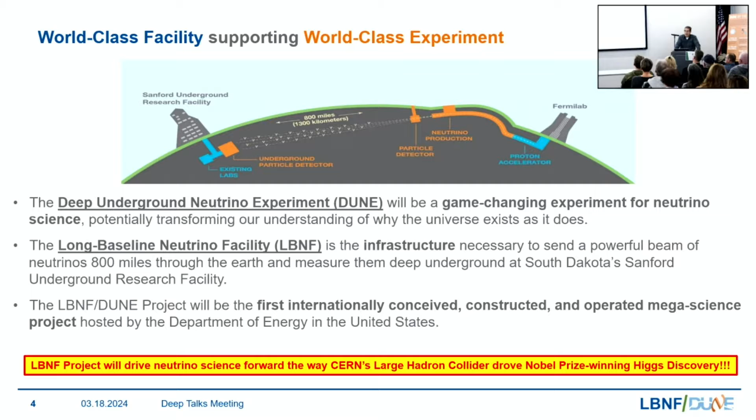I call this next slide the big picture. What you see on this slide, the project is broken up into 5 sub-projects. There's the far site location, which represents Lead, South Dakota here. And 3 of those sub-projects are here and going to be built underground, starting with the far site excavation, which you're going to hear more about in this presentation.

In addition to that, you've got the BSI, which stands for Building and Site Infrastructure. And then you have the FDC organization, which stands for Far Detectors and Cryo Infrastructure. All three of those projects are going to be hosted here in Lead, South Dakota.

Now on the right-hand side of the screen, these are the two sub-projects of the five that are going to be built at what we refer to as the near-site conventional facilities. That lab is the Fermi National Accelerator Lab in Batavia, Illinois, which is a suburb of Chicago. The two that you see out there are the near-site conventional facilities plus beamline, and in addition to that, you have the actual near detectors.

From this picture, and it's a very simplistic picture of what we plan on doing when we start running the experiments, the neutrinos get launched from an accelerator located at Fermilab, which is 800 miles away in a different laboratory. These neutrinos will be launched underground, and they will be shot towards Lead, South Dakota, where we're going to actually measure and see if we can detect them as they come through. It's a very simple process. They shoot the neutrinos at us, and we catch them. It's as simple as that.

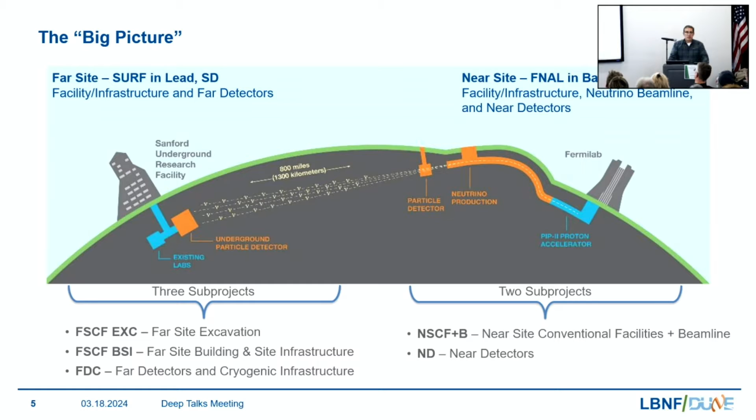So there are three science goals that the LBNF DUNE experiment is trying to achieve. The first goal is to determine if neutrinos are the reason the universe is made up of matter. The second goal is to prove Einstein's dream, along with mine, of the unification of forces through subatomic phenomena. And the third and last goal is to observe neutrinos emerging from an exploding star and probably witness the birth of a neutron star and/or black hole.

The picture on the left-hand side of the slide is what we're building one mile underground at the far site location. And the picture on the right is the near site location of what the facility is going to look like in Batavia, Illinois. So again, you've got the LBNF side, the far site that catches the neutrinos, and then on the right side at the National Accelerator Laboratory in Illinois, they're shooting the neutrinos at us.

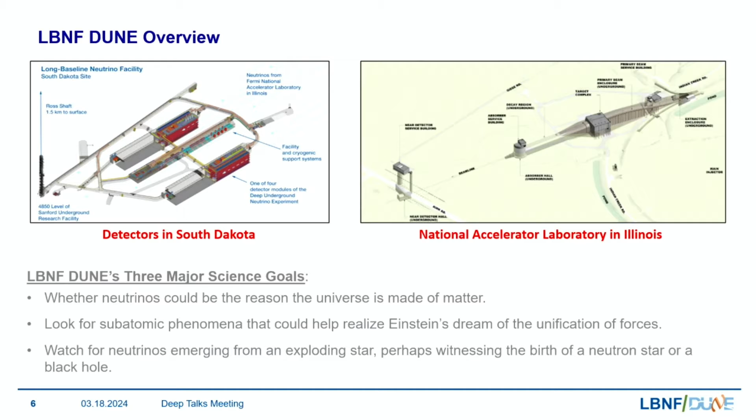All right, so this next slide is a satellite picture of what Lead, South Dakota looks like. A lot of people ask me, where is this experiment going to be? Well, first of all, it's underground, so you're not going to be able to see it. But if you happen to be sitting in the visitor center today, you could see that red box at the very top of the screen, at about 11 o'clock. That's the visitor center, and that's where you're sitting right now.

Now, just to throw out some points of interest along the way, if you're familiar with where Mill Street and Summit Street are, that's the intersection there. And just southeast of that, in that canyon along Kirk Road, if you're familiar with the abandoned coal plant out there on Kirk Road, you'll see where the LBNF project is currently being built underground.

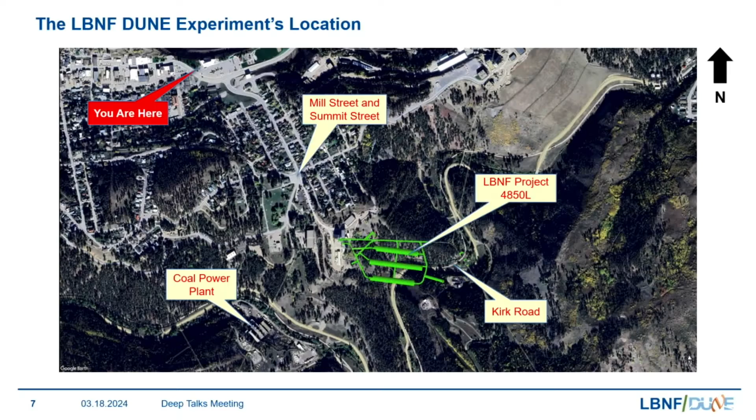So now you've all been educated in high energy physics in the field of neutrino research and science. Now we're going to move on to the exciting part, which is the first phase of the Far Site Conventional Facility, which is the excavation subproject.

I'm sorry? Can someone turn the lights off in the back? Thank you for that suggestion. Is that better? Okay, all right. Thank you for that suggestion.

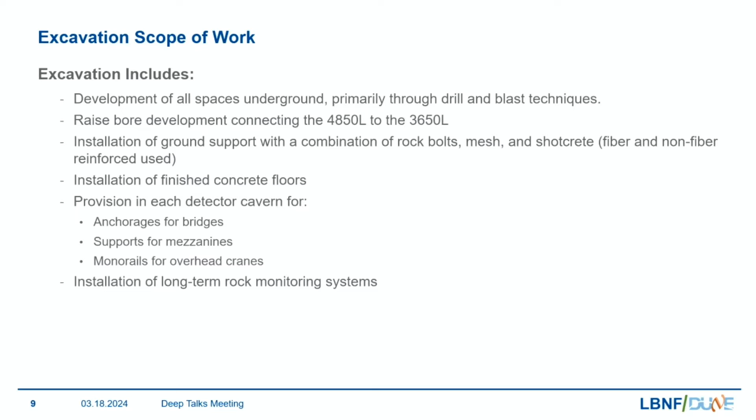All right, so let me advance to the next slide. This is a very high-level list of the scope of work that's going on underground for the excavation sub-project. You can see in those bullets and sub-bullets, it starts with the development of all the spaces underground, and that's primarily through drilling and blasting. In addition to that, the scope includes a raise bore development that connects two underground levels, the 4850 level and the 3650 level. We're going to discuss more of that later on in the presentation.

Besides that, we have the installation of the ground support, and that includes everything from rock bolts, mesh, shotcrete, and such. And every flat area that's been excavated to date will be poured with concrete, so there's the installation of the concrete floors for the drifts as well as the caverns. And each detector cavern, the north and south cavern, which you're about to see, has provisions for anchorages for bridges, supports for mezzanines, and monorails for overhead cranes. This is really teeing up the next sub-project, coming in just a few months, probably July of this year, which is the BSI sub-project.

And last is the installation of long-term rock monitoring systems, and that's required to detect underground movement, which I think is kind of important if you're going to be working underground a mile below the surface. This also is the basis of the scope of work for TMI, which we'll see here shortly.

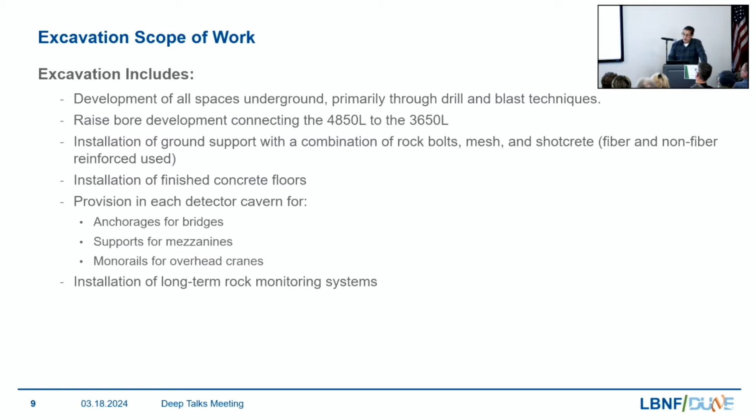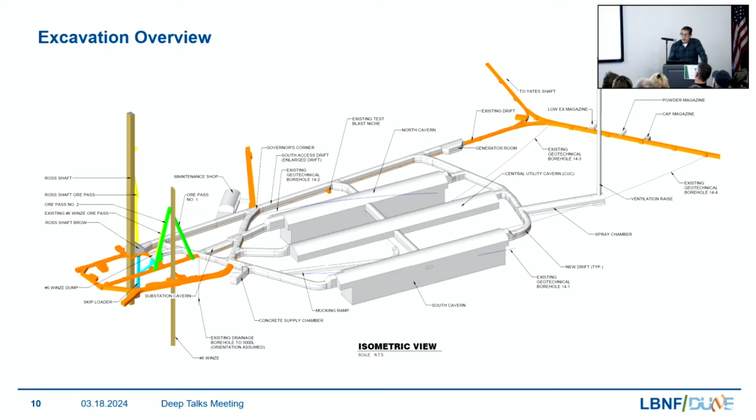So level to level, one of the things that Thyssen Mining had to do was to go ahead and put that raise in using a raise bore excavating type technique, which I'll show you later. But I just kind of want to point that out to you, and we've got some really neat videos to show you on that.

All right, so this is what the north and south caverns, as well as the central utility cavern, look like underground. They're very big. You've got the north and south cavern, and again, there's three caverns, but I only have the two shown here. But the north and south caverns are identical in size. So essentially, they're 66 feet wide for the north-south cavern right here. They're a total of 92 feet high, so that's like the equivalent of a 9-story building. And they're 475 feet in length.

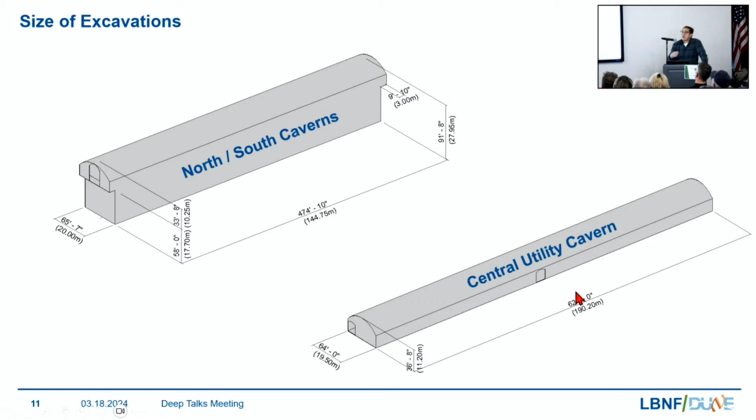Okay. Now, if you jump down to the central utility cavern, it's not as tall. It's only about 37 feet tall. It's 64 feet wide, but it's 624 feet in length. Okay, so the central utility cavern is what gives the power to the north and south caverns.

All right, so this next photo is a plan view of the underground. All right, so I'm happy to report that the excavation sub-project finished exactly a month ago today. So all the cavern spaces that you looked at in the previous slides, as well as all the drifts and the maintenance shops and all that, are 100% complete at this time.

The only thing that remains, and this slide is a little bit dated, is the concrete floors. If you remember, I said all the flat surfaces need to be fully concreted. So maybe about the middle of May, this whole drawing that you're looking at will be that same color, that green, and that green represents concrete complete.

So right now, the north cavern, and I'm just going to kind of hover around that with my cursor, that's probably about 98% complete. There's just a little section in the middle that needs to be concreted right where my cursor is, but otherwise it's pretty close to being done, and it most likely will be done by next week. And that means from one end to the other end it's fully concreted.

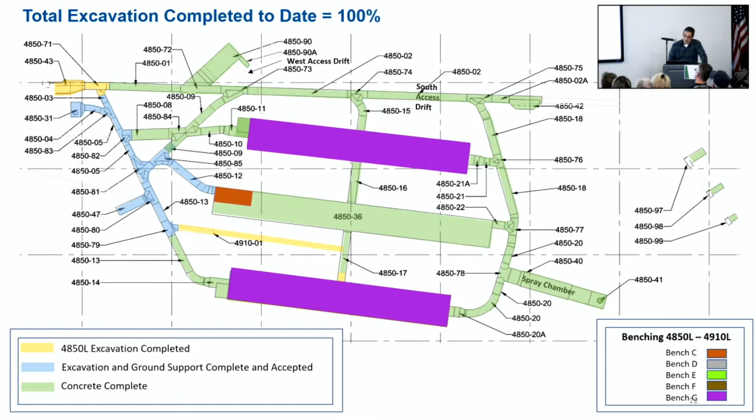If you jump down to the south cavern, it's about 50% done on the east end of this cavern. Right where my cursor is, that should be all green. And again, we should be done with the concreting activities probably about mid-May. In which case, if we were to look at this drawing, it'd be all colored green at that point. So we're only a few months away from being at the end of this project.

So this next slide, I call this my fun slide. I have to be careful on how I define fun. But this is what I call my excavation factoid. So what I've compiled is on the left and right side of the slide. A lot of people ask me, well, how much have you excavated? How much rock has been excavated, drilled, blasted, and brought to the surface? Well, the quantity is approximately 310,000 cubic yards, or the equivalent of 820,000 tons. Now, if you compare that to something on the right side, something that everybody in this room would be familiar with, 820,000 tons is the equivalent of the weight of 8 aircraft carriers.

Now, explosives consumed. A lot of people ask, well, how many tons of explosives are used? Well, that could be summarized as 560 tons. 560 tons of explosives were used to produce 820,000 tons of blasted rock or muck. So 560 tons produces 820,000 tons.

Now, if you want to put that to something that everybody would be familiar with, and this is where I have to be very careful so I don't end up on the Department of Homeland Security's watch list, the equivalent energy of 560 tons, that energy that's released, is the equivalent of 651,000 kilowatt hours. Now, what is that? That's enough energy to power 3,000 homes in Lead and Deadwood for a week. That just kind of puts it in perspective.

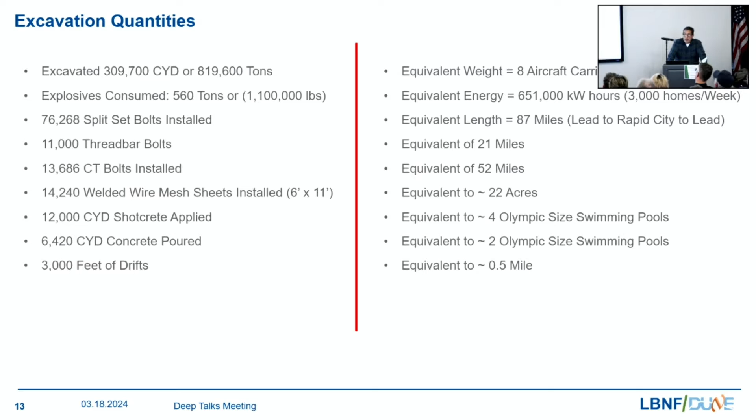Welded wire mesh sheets, I call them sheets, some people call them panels, but TMI installed close to 14,000 of these sheets, and they measure, think of it like a 4x8 sheet of plywood, but these are 6 foot by 11 foot. And they have installed 14,000 of them. So if you put them end to end, side to side, you'd have enough to cover a 22-acre small farm.

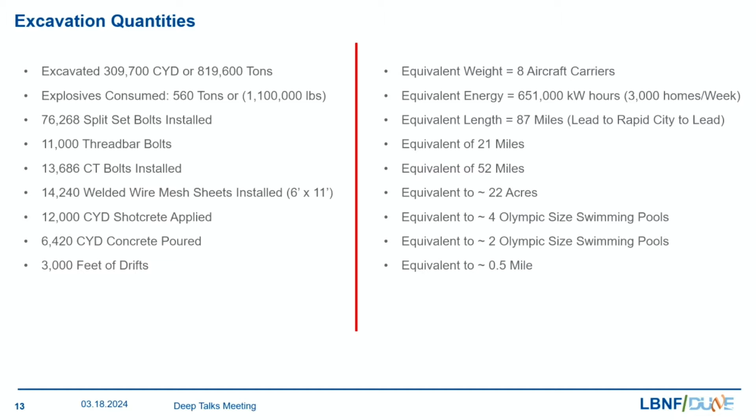In addition to that, cubic yards of shotcrete applied. You'll hear a little bit about this when Ryan talks about it in his presentation, but 12,000 cubic yards of shotcrete applied to date is enough to fill 4 Olympic-sized swimming pools.

Concrete poured: as you saw in the previous photos, we're still pouring concrete, and we'll still be pouring concrete for the next couple months. But what we've poured to date is about 6,400 cubic yards, and that's enough to fill 2 Olympic-sized swimming pools. And then last, as I mentioned before, we've got about 3,000 feet of drifts that have been drilled and blasted, and that's a little over a half a mile in distance.

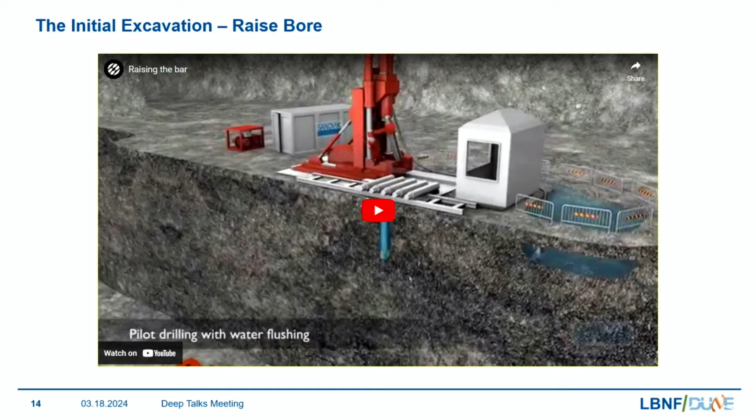So I've got a short little video, an animated video that I want to tee up for you guys. But every construction project has to have a starting point, and this project's not anything different. The raise bore was necessary to go in first for both ventilation and cooling. And I have a little animated video that'll take you through the process now.

If you remember the slides, we had 2 different levels. You had the 3650 level and you had the 4850 level. Doing the math, that's 1,200 feet between each level. And a level is like thinking of it as an elevation, okay? But this is underground, okay?

The process starts out with, and I'll just kind of circle with my cursor, this is the raise bore machine, okay? And it gets set up right over the target, and it just drills straight through, okay? And TMI had a directional bit to keep it on its target, but it had to hit a target that's over 1,200 feet away. So with that type of accuracy, they used a directional bit that was Wi-Fi controlled to keep that bit on target.

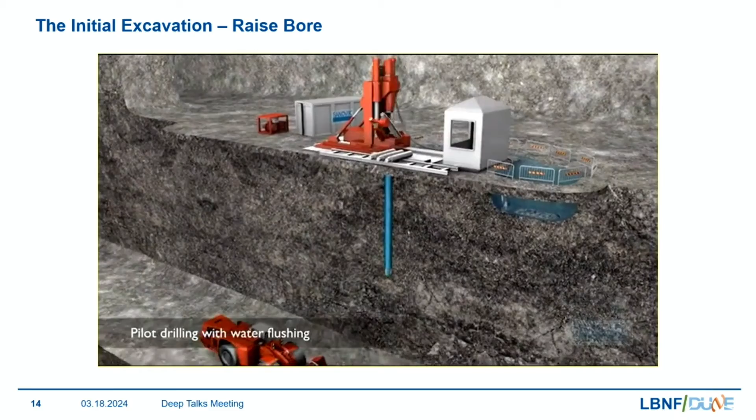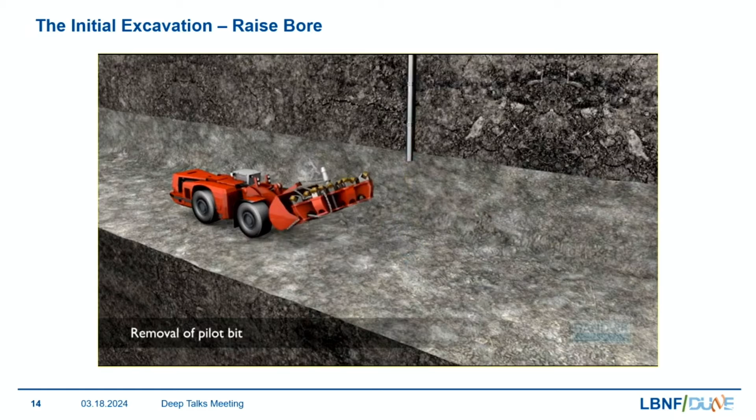So I'm going to start that video so you can see the whole process. So a little introduction here. But it all starts out with a piece of equipment set up over the target, and you can see those are drill strings or drill stems, and they get assembled, and then they drill deep into the ground until they hit the opposite end. In this case, the opposite end is 1,200 feet away. We take the directional bit off, we put this cutter bit, and we back ream it in reverse.

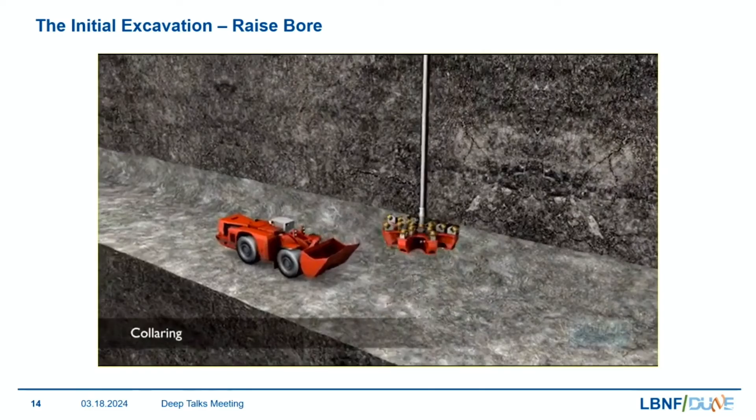So again, this is a very simple process, but a very complicated process, and to be able to hit that target with the accuracy that it needed to be was really important for this project. So this was something that TMI really shined on.

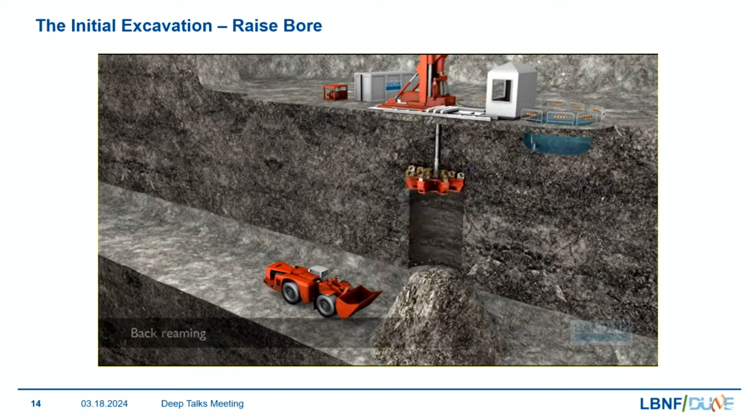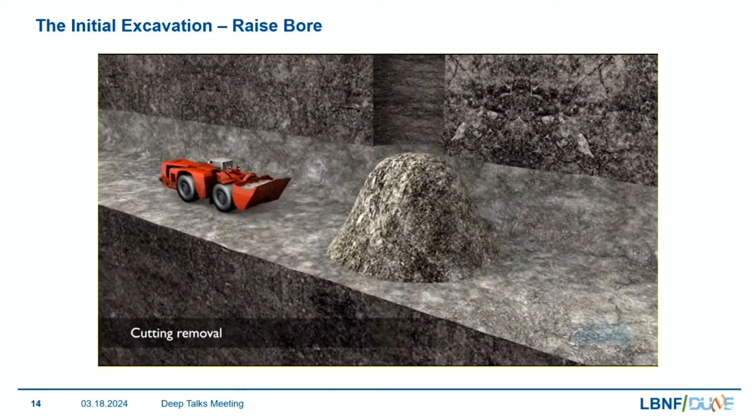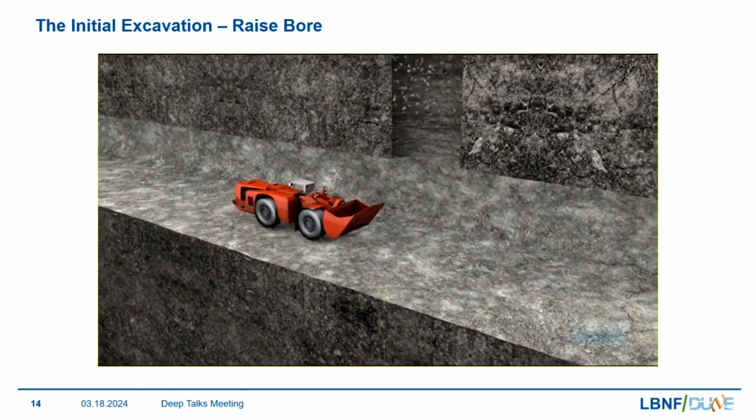Oh, okay. Sure, okay. That's good to know. Thank you for sharing that with us. She was saying that there's the same process in the Homestake days. They used the same process back in the day when they were mining for gold, and there's one just like this back at the mining museum. Smaller version of it? Okay. It's a 5 footer, 5 foot in diameter hole? Yeah. Okay, so this hole that TMI had to put in, it was about 12 foot in diameter.

So we'll go on to the next slide. The process that we did underground actually took us 5 months, okay? So I've got a couple pictures here. Again, I want to just hover around the 3650 level right here. There's the 3650 level, and that's where the actual raise bore is set up right over its target, and it drilled 1,200 feet straight down into the spray chamber, which is right here at the bottom.

Now, the picture on the right, you'll see James Ricard standing right next to the cutter head. This is after they dropped the directional bit off and they attached the cutter head to it, and they're getting ready to back ream it to create the 12-foot diameter raise for ventilation and cooling. Right next to James is Sid DeVries. He's one of our project engineers on the project team.

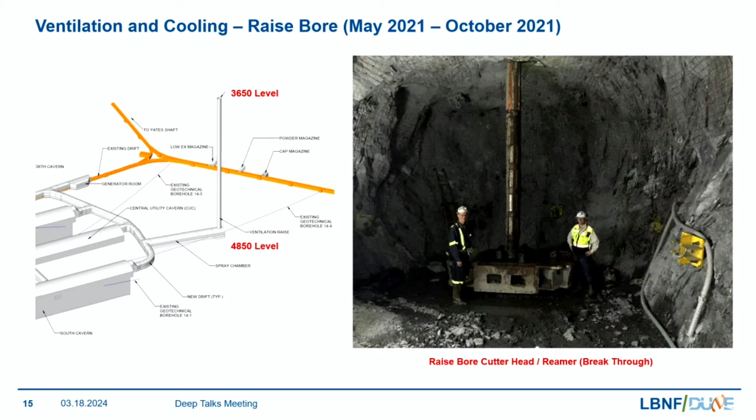But this, you can see, this is the overhead section of the spray chamber, and this is where the 12-inch bit came through, broke through into the spray chamber to allow them to attach the cutter head, which now will go back up and create that ventilation raise. So again, a 2-minute video, but it took us 5 months to get there.

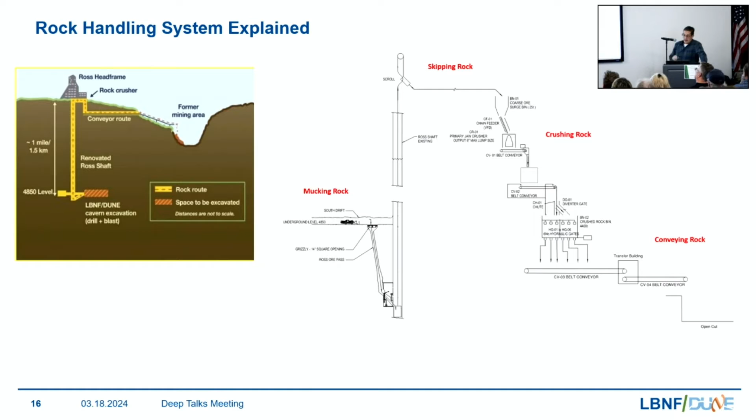The picture on the left is a more simplified cartoon illustration of how we bring the muck underground to the surface, where it's then crushed. Comes up through the Ross head frame. It gets crushed. It's put out on a conveyor belt, and then it's discharged into the open cut, which is right behind you right outside that window.

The schematic, on the other hand, is a little bit more intense. Essentially, what happens is when you're done blasting your rock, whether it's in the drift or in the cavern, we have this large mucker that comes up and it picks up all the loose rock and it takes it over to a grizzly. Now, a grizzly is nothing more than just a large sifter.

It sifts smaller rocks from the bigger rocks. The smaller rocks tumble down the ore pass. The bigger rocks get caught at the top of the grizzly, where we have a rock breaker, and it breaks big rocks or boulders into smaller rocks that allows it to go through the grizzly. Kind of very simplistic type process, but it works.

Now, once the ore, I should say the muck, goes down this ore pass, at the very bottom of this ore pass is what we call a skip. And it's waiting at the bottom, and all these rocks get loaded up into the skip. And a skip is nothing more than like a rectangular box. And so we load up this box. We typically get about 7.5 tons inside the skip, and then it brings it up to the surface.

Now, all that muck that's stored inside that box can't be put out on the conveyor belt. So at the very top of the process, we have a crusher, okay, up in this Ross head frame. I'm going to switch and I'll kind of point, here's the Ross head frame. This is where I'm currently at right now, okay? So it takes the 12-inch boulders and it breaks them into bite-sized rocks that are about 3 to 4 inches in diameter. And then that allows it to be put onto a conveyor belt, and that conveyor belt takes the rock out to the open cut where it's discharged.

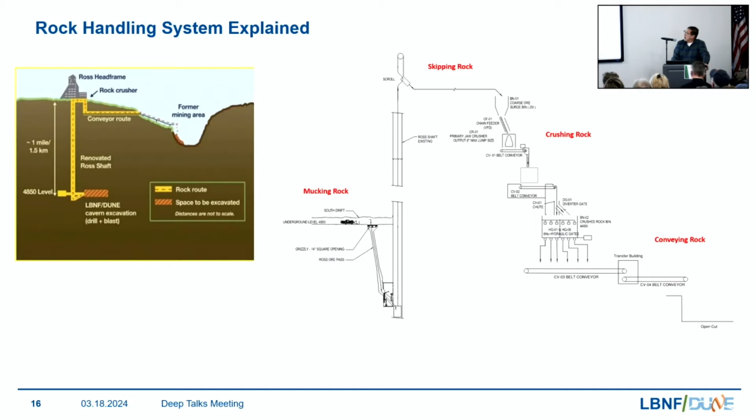So I'm going to begin with a video here. And this is a cycle of mining. How many people in here have been in mining before, have worked underground? A few? Okay, fantastic. Well, you guys will have to correct me if I say anything that's wrong, so feel free, I take that well. So this is a typical cycle of mining, and this was at another project that we did. So the video will start at the end, which is the blast, and that's where the new cycle begins.

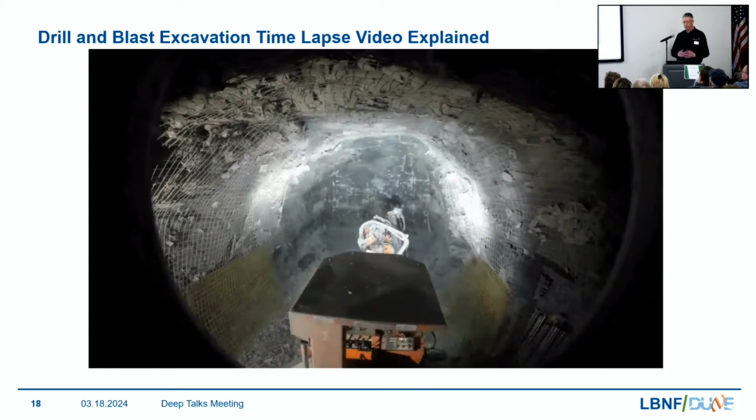So we come in, we muck it out, that's where we take all the spoils from that blast, and we clear that out, and then get ready. And because now you have loose rock overhead, we have to support that rock. So we come in with a bolter and we install bolts, as Mike indicated, with different bolts that we've used here, as well as those mesh panels that we install to hold it.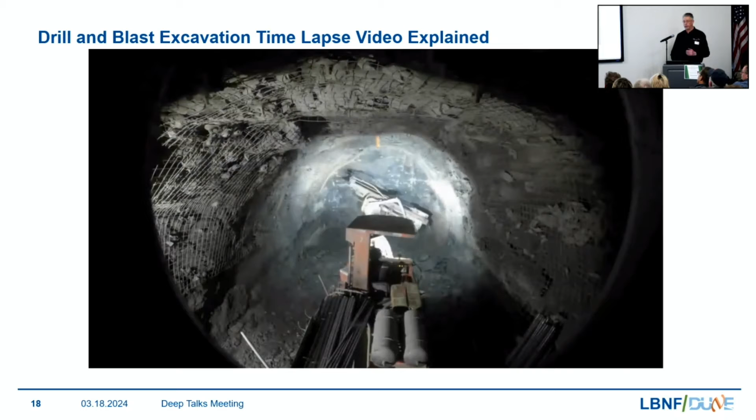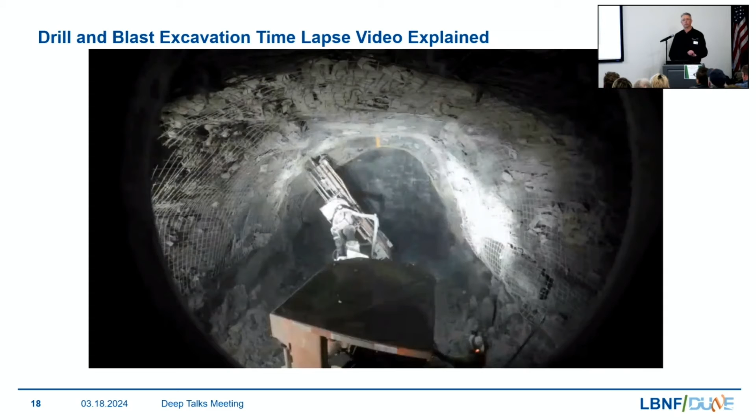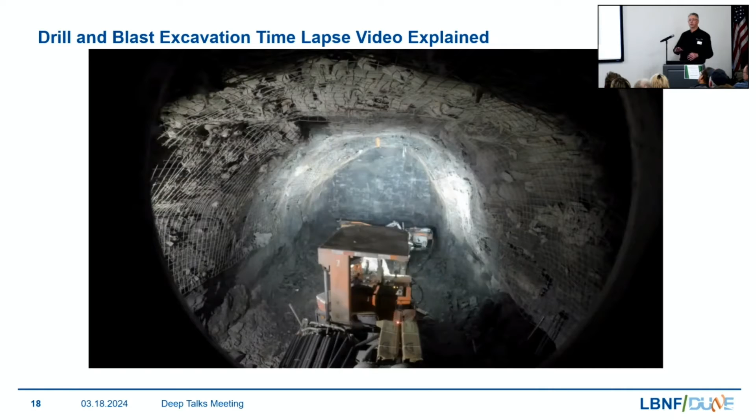Now, real quick, we use words in mining that are a little different. So Mike has said drift. So a drift is open on one end, and then it's got a heading where our working face is. So the face is what we're working on. Overhead is the back, and then you have the right rib and the left rib. Instead of using walls, right, we have to come up with our own language. It makes us feel better.

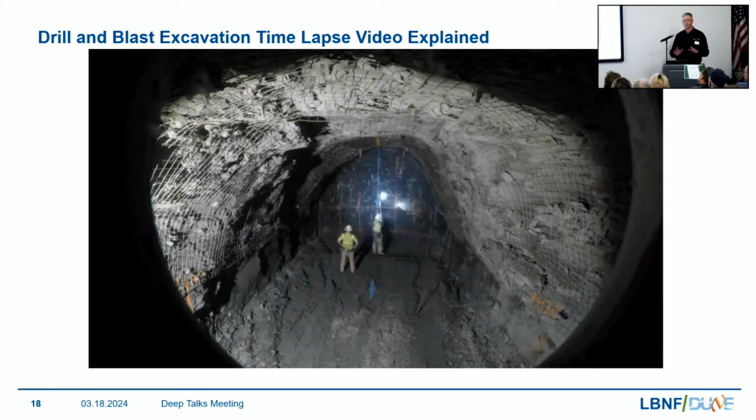So they're still bolting up here in the video, and then they'll get done shortly. And then they clean it up. Now here our surveyors are coming in, they're cleaning it up, and they're going to start marking the face or painting the face. That's where they survey it out and they find out where the next pattern is that they need to drill the holes in order to put the explosives in to blast the next round. This is repeated over and over thousands of times in a project of this size.

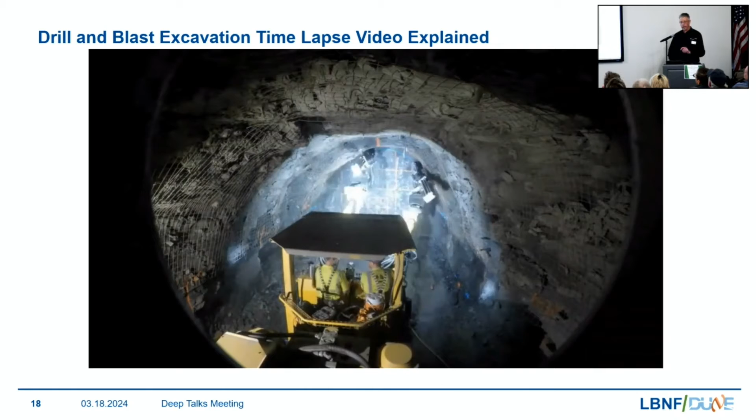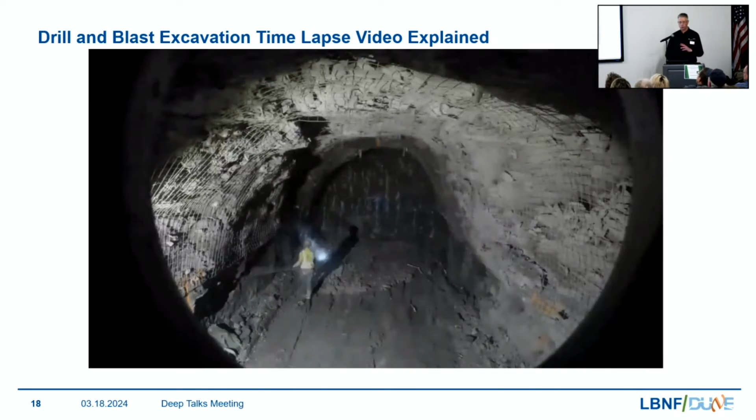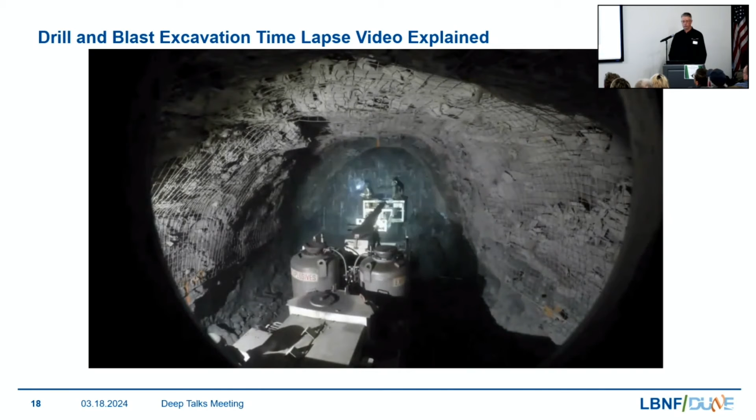So now we've got a drill in here, we call it a jumbo, and the drill has got two hands that come out and they drill the pattern for you. And so we've done that. We're now having it checked out. Now we're loading our explosive material into those holes for a final cycle of the round. Now sometimes there's an intermediate part where we spray shotcrete, which is another area for ground support. And so that's the end of it. So we've loaded the round and then blast.

All right. So here is a cycle that we did here at Fermi. Instead of blasting the face, we did downhole blasting. And so we've got a video here showing that. So you can see that it's set up. What we're going to do is we're going to blast this, and you can see all the holes that we drilled. So that's what you're going to be looking for right now.

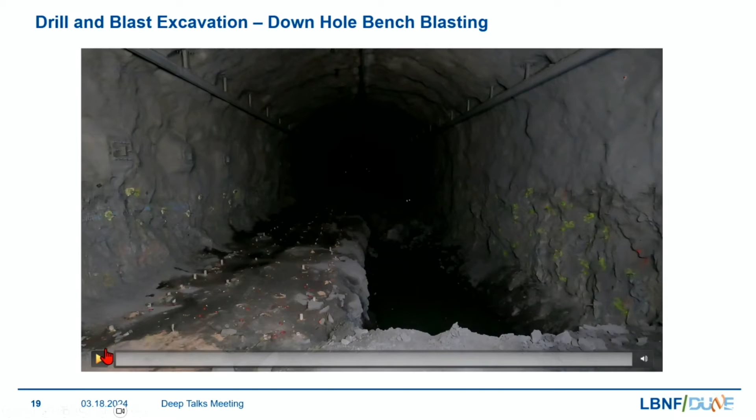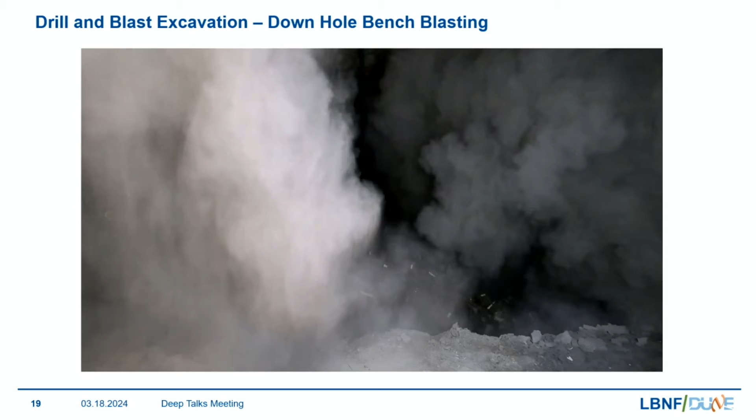And so after the blast, we also have to let the smoke clear and all that get out of there because there's a lot of harmful materials. So we smoke out and then we go in there and start the process all over again. So here's a couple still photos of the process. So you can see they're, as I said, setting out the blast pattern. They're painting the face. They also will need to do some scaling to get rid of some of that loose rock. And they're doing that with our jumbo, our drill.

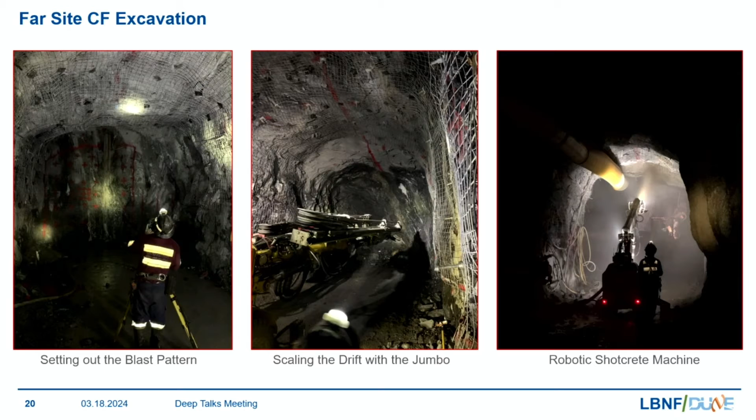And then the far right picture is that other phase that we used here at the Fermilab project, which is the application of shotcrete, which we sprayed on all the ribs and on the back, using that mining language again. So here's some pictures of the excavation of the caverns underway. So right here you can see those monorail beams on the top. Those were not used for the mining excavation at all. Those were used for the next phase of the project, the BSII and other phases, but we had to install those early on in the project.

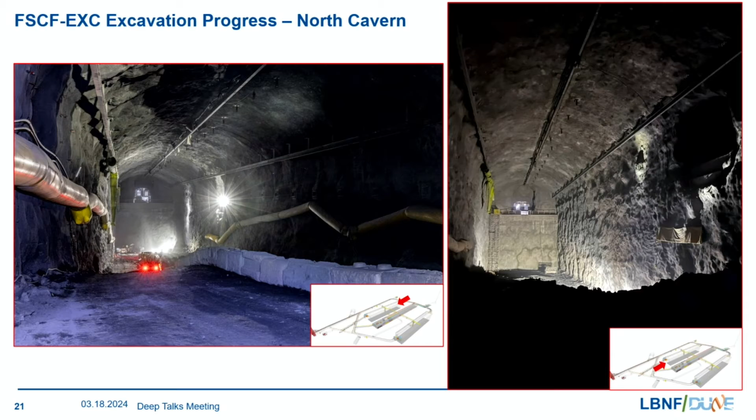So the way that we approach these caverns is we start at the top. So we do a pilot drift, and then we work our way down, or we bench down. And this is that process. Well, as we bench down, our gear becomes captive. So we have to build a ramp down, and that's what you're seeing on the left, a ramp down to the base of that cavern in order to get our muck out as well as our gear. And then the picture on the right is just another beautiful view of those caverns underway.

And here's a good view of the cavern as it's being constructed. We have a drill in there. Now just keep in mind, if you go out into the visitor center, you see that cage out there, or the elevator, as normal people call it, but we call it a cage, because once again, we like our own languages. And so everything that we put underground had to go on that cage. And so this large piece of gear had to go down through that shaft. So we had to cut it all apart and then weld it back together. We have some of the best mechanics in the industry, and they're here working on this project. And so they put that together. So every day our crews have to go underground. All of our material has to go down on that cage, same size cage.

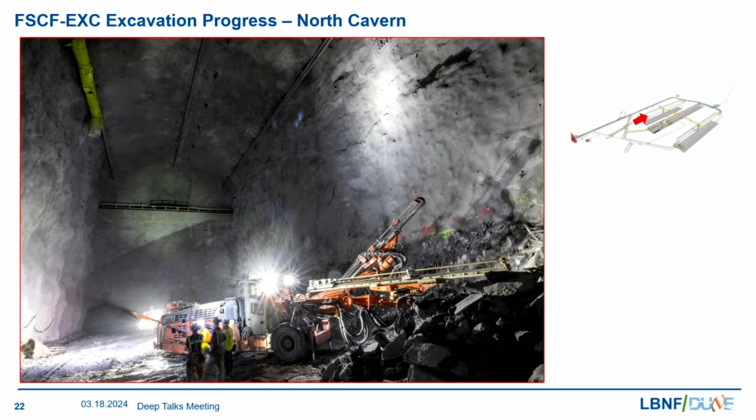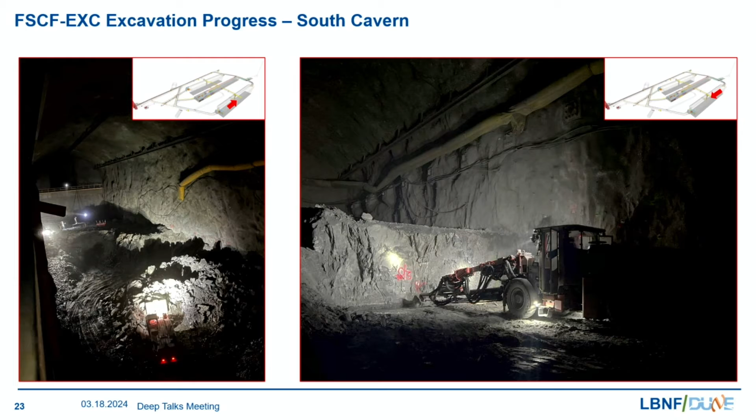That's the world's largest bolter that we had to bring into this project in order to put 20-foot long bolts into the back and into the ribs. Those are those CT bolts. So imagine that, the largest bolter that exists in the world, we had to take the cab where the operator works, we had to cut that baby in half.

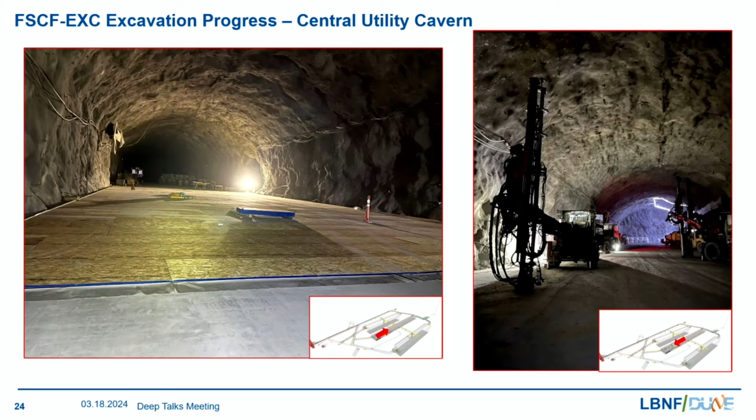And there's a lot of wires going through there. We also have great electricians. And so we brought them in to help put this gear back together. And then it had to be recertified by the company that supplied it. So very long process in order to mobilize equipment in an underground environment like that.

So here's a couple real wow me shots, right? This is the excavation as it's complete. You can see in the north cavern. So one of the aspects that we had to do that was touched upon was these large pedestals that we had to put in for the concrete. Those pedestals will hold the structural steel for these large tanks that's going to hold 70,000 tons of liquid argon.

That's a lot. So these massive tanks will come in. Well, those steels had to go onto these pedestals. So you'd see a close-up of the pedestals, and these little dashes you see on the side, those are square pedestals that we built in order to hold those structural steel tanks. And then you can see the floors poured. So really amazing to see.

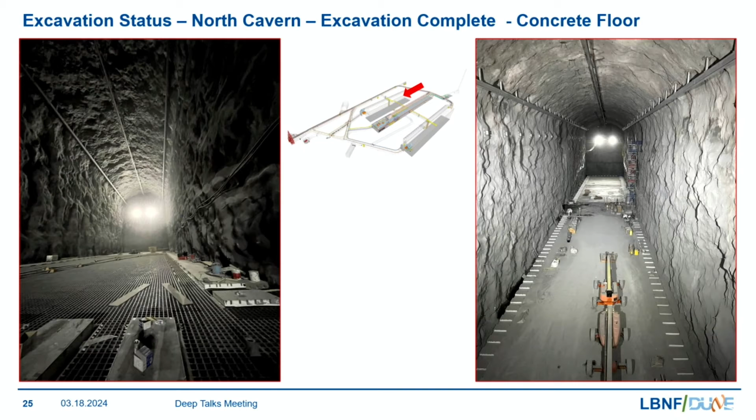You can't see any people walking around there, but these caverns are 90 feet tall. So if you did, that person would look wee little size, right? Little leprechaun in there. So here's a good picture. You can see a person walking in the cavern. This is once again standing on the concrete, looking down in the north cavern.

These are massive spaces that we built, and we're really proud of the work that we put into putting these together. Really excellent job, and I think that the quality of the work speaks for itself.

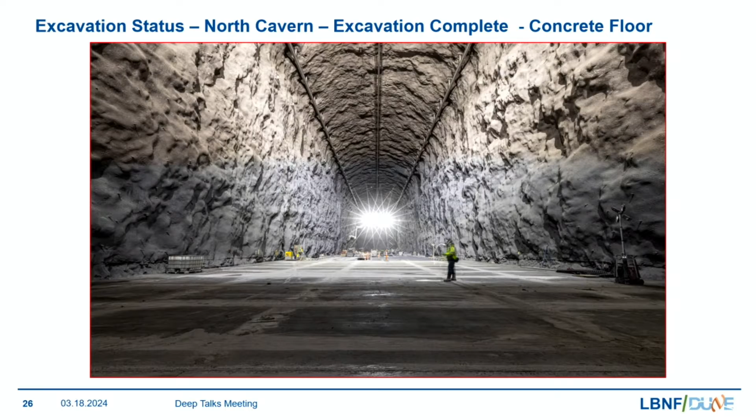And so the last excavation part that we had to do was where the Ross cage comes down and where you get off. In order to get all that steel in there for the next phase, these steel beams, they didn't want to weld them back together. And so they have to bring them down as large steel pieces. So we had to enlarge that space.

So before, when you got off the cage, it was about 10 feet roughly in height to the back. Now it's, James, what is it, 90, 80 feet? 60 feet when you get off the cage right now. So it's really impressive to see that space has just been enlarged and it looks completely different. So that's the last pictures we have of the excavation.

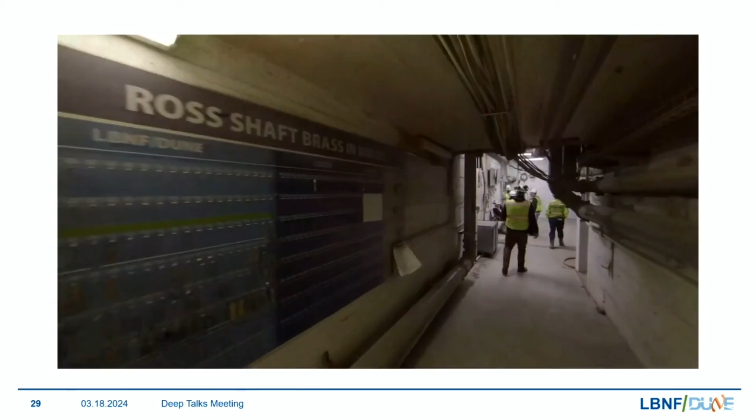Okay, so we're at the top of the shaft there. We're walking down the ramp now. You see on the left-hand side the brass board. That's where we tag everybody in, so we understand who is underground or not. Each person carries 3 tags, one to be at the top, one to be on the bottom, and then one to be on their own person.

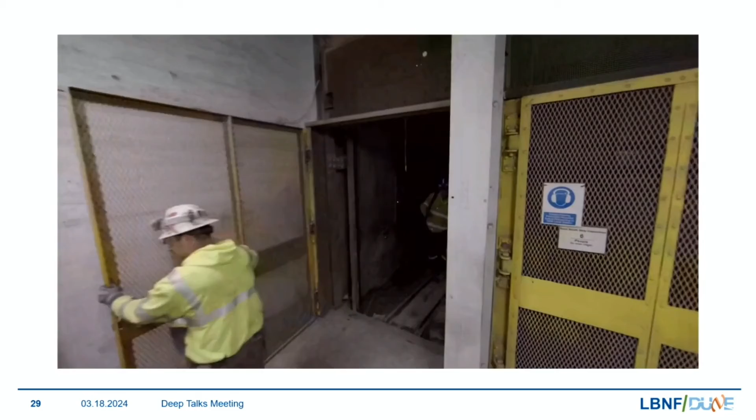That's the cage that we've been talking about. It's exactly the same size as the cage in the visitor centre. Normally we can carry 29 personnel plus 1 cage tender. I think on this cage here there's probably only about 15 or 18 people, so it can get pretty cramped, you know, when we get on there.

Takes around about 10 minutes to travel from the surface 1 mile underground to the 4850 level. And when we get to the bottom, you'll see us entering the Ross area just here. So the cage tender, he will put the cage on chairs. So basically that allows the tension to be relieved off the rope so we can offload and unload heavy pieces

of equipment. Because a lot of the equipment is actually placed in the cage and then rebuilt, or sometimes the longer pieces are actually slung underneath and then pulled out into the station. So the cage tender, he allows everybody else off the cage, and then they'll put their second brass on the brass board underground before going to their works area.

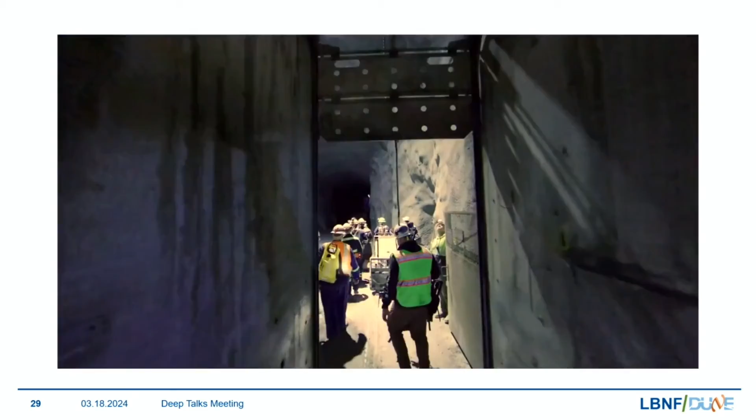So as we come out now, you'll see in the photo from Ryan, we'll be walking out into the Ross Station area. Total height now is 60 feet, and then it chamfers down. And this is mainly so we can get the large cryostat steel underground and easily off the slung load. Originally, this was only 10 feet high. So this was a major excavation and also close to the shaft structure.

We're now walking towards the workshop. That's TMI's workshop. This is where they do all the maintenance on the equipment, and also where they built, reassembled all the equipment after getting it underground. And this is where they're disassembling the equipment now to sling it back up out from underground.

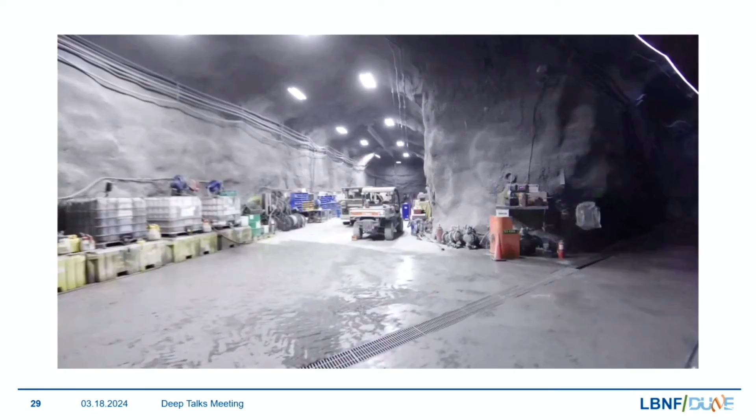After that, now we continue walking towards Governor's Corner. This is basically the main intersection underground on the 4850. Going in that direction towards the north is the West Access Drift, which allows us to walk all the way over to the Yates and the Davis campus. We're now walking towards the North Cavern, and we'll enter the cavern at the west end. We have an overlook there, and then we'll be able to see inside the caverns.

So as you walk toward the caverns, you can see the monorail beams in the crown and on the spring line. You see the ladder access way, scaffold access way to the left of me, and there's the guys working underground. We have some concrete slab there cast at the bottom, and then further back is the cavi drain, which is the drainage layer. This is a nice fly through with the drone showing the caverns. You can actually see all the shotcrete, which is a spray concrete that seals the caverns.

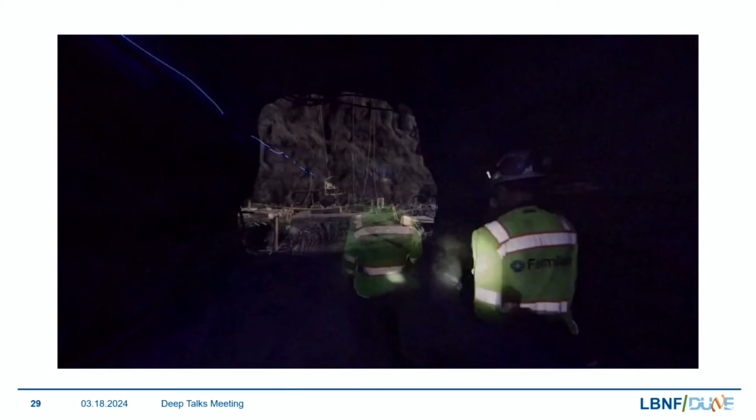Now we've walked down the decline. We're at the bottom. We're at the 4910 level. So this is where the workers are currently working to pour all the concrete. You can see the pedestals in the foreground and the shotcrete on the walls. And the workers there are installing the drainage layer, so any water that gets captured can go underneath the base slab and then out of the drainage system. This is a nice walkthrough with the camera showing the final base slab.

Now we're walking towards the center of the caverns. This is the middle of the cavern, and eventually there will be a steel bridge placed across this cavern to allow us to connect to the north, CUC and south cavern. We're now walking towards the spray chamber. This is where we install all that equipment to remove the heat from the experiment. And at the very, very end of that chamber is that 1,200-foot raise bore.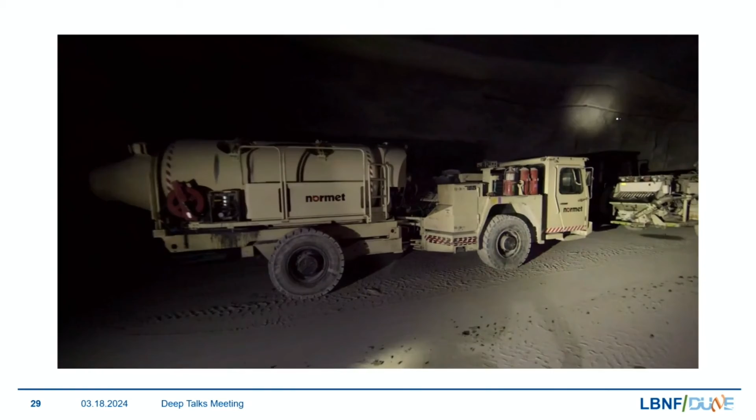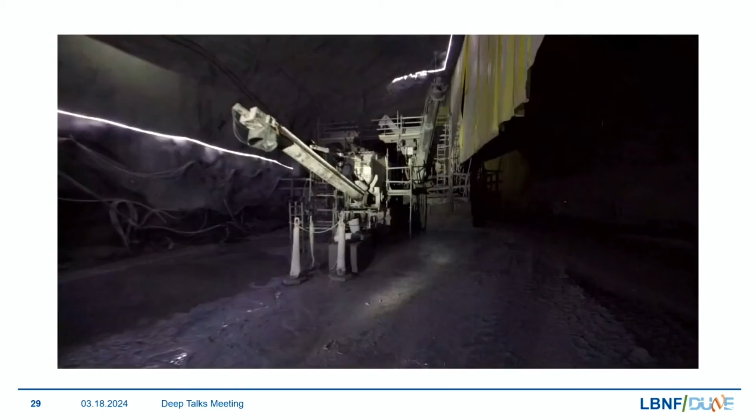This is the central cavern, CUC. This is where all the equipment is to run the experiments, but we're using it as a storage area now. We have the concrete bags, and also we have some equipment storage. That's basically the transporter for the cement concrete, and that is the shotcrete machine that they use to spray the concrete. We also have 2 batch plants installed in the CUC, which we mix all the concrete and shotcrete underground. We deliver the concrete in dry super sacks. They put them in the mixer, then we add water, and then it discharges into the transmixers.